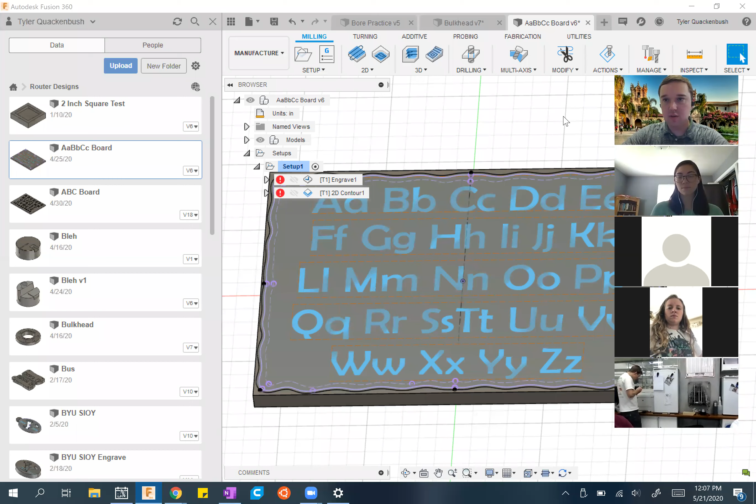Okay, so first things first, let's do this. Put that away for now. Okay, so with the 2D contour practice, oh, that's what I didn't pull up. I'm gonna open up that 2D contour practice that you guys were working on. Just give me a second. Okay, so in that 2D practice, you guys who did it went through a bunch of different things. Basically, you took this guy, and on a bunch of these different pockets, you used different tools and different parameters to mill out a bunch of these toolpaths.

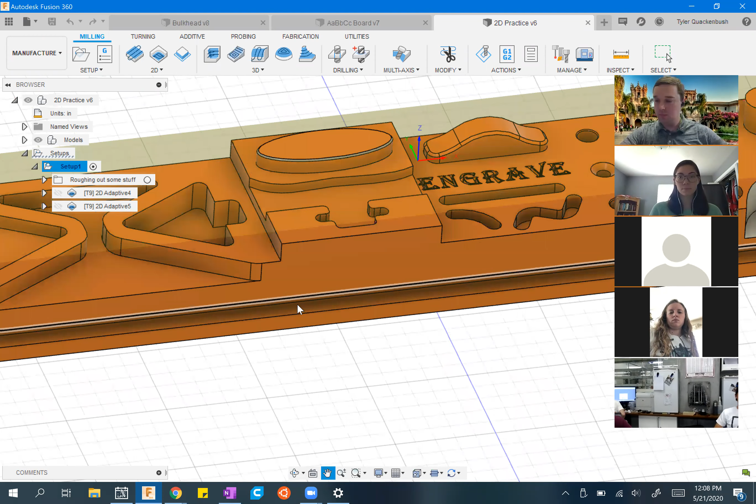So one of the big things with the 2D adaptive that I hope you guys got out of this practice assignment was the difference in selections. So when we come into here, actually, let me just make a brand new one. Oh, dang it. See, the window where I see your faces perfectly hides where that window pops up. Okay, so when I come in to create a 2D adaptive and I have some tool, when I select my geometry, we talked about the difference between selecting a face versus selecting a contour.

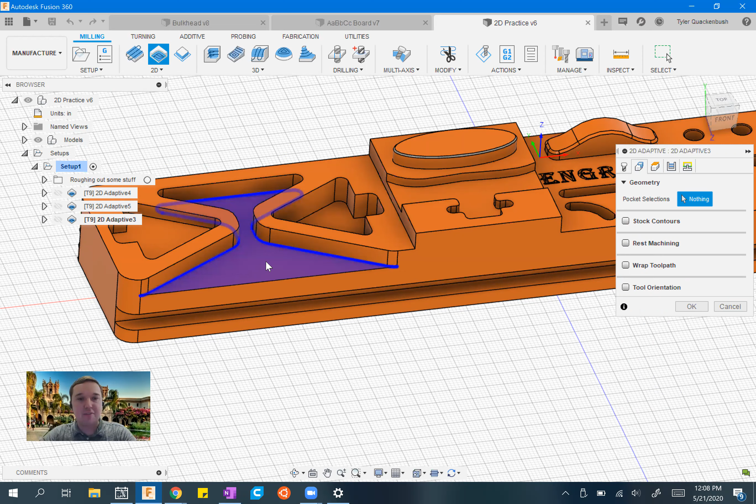And one of the big things in there, and something that I've been since learning, is when you select a face, Fusion has a little bit more information to work with. It can detect that there's a face that drops down over here and faces that come up. Therefore, it's able to guess that you're approaching and using this as an air region where you can approach from the outside and not hit anything. Mastercam doesn't make any assumptions like that, which is powerful, and yet sometimes you just wish it would.

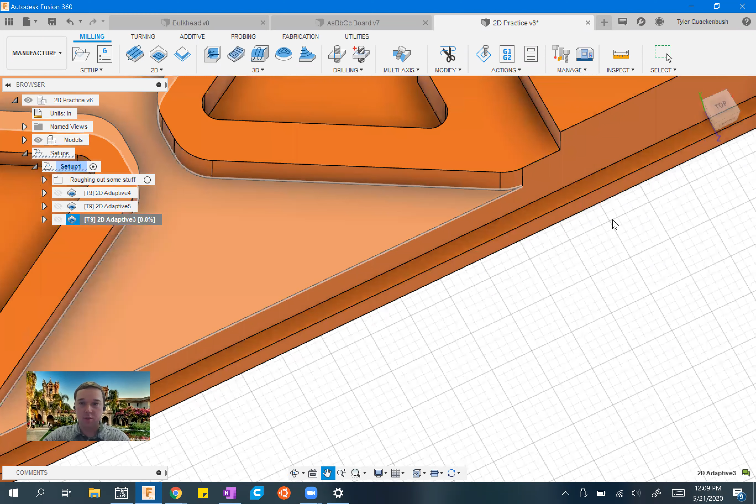The other way I had you guys select this in that practice assignment was to go in and select this chain, just that guy, and verify which side this arrow is on. So you'll notice when the arrow is on this side, we'll mill from this edge of the pocket. And once again, Fusion uses a little bit of background information to figure out what exactly you're wanting to do. Versus when we click that arrow, we get off to the other side. In the next practice assignments, you'll have to do some other weird stuff too.

Sorry, one sec. Excuse me. Can you guys hear me now? Sorry, I lost my video.

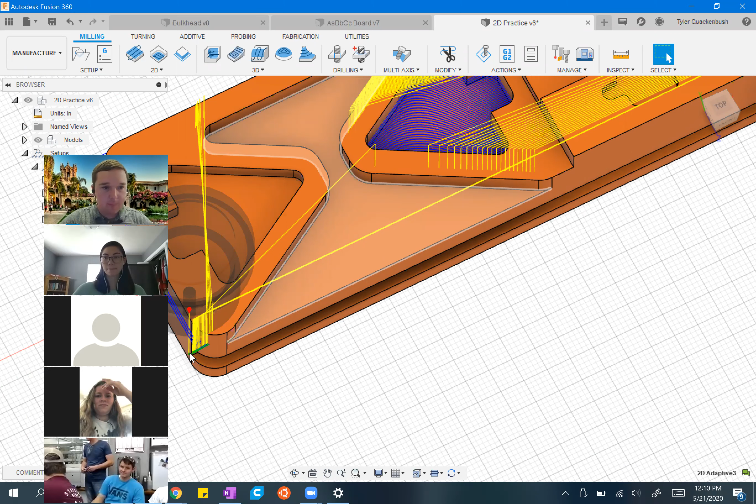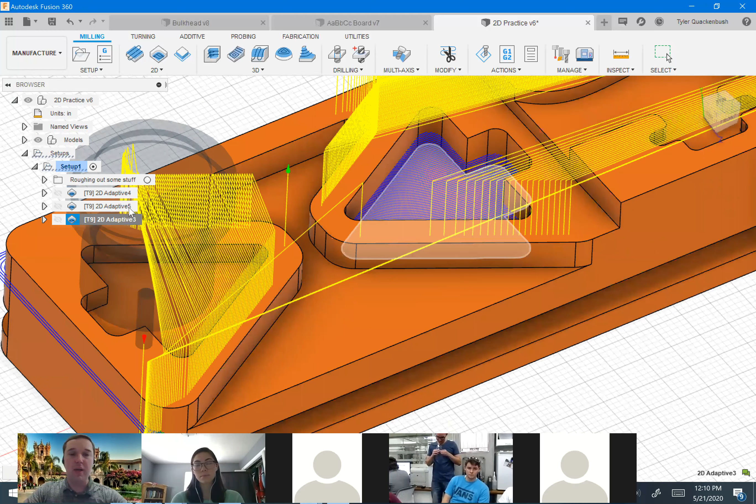Yep, great. So you notice when I flip that arrow, now Fusion is using what it knows about my stock and that contour and the side I told it. So now it's saying, oh, okay, you want me to mill away all of this stuff and leave these intact, which is not what we want to do. But if we just add a contour, that's the best Fusion's going to be able to figure out. So you can end up with a situation where you've got something along these lines.

So let's say I want to select the contour that borders this face. I select that contour, but that's not entirely what I do. If you remember in Fusion, you click on that again. You select whether you want a closed or an open contour, in this case closed, and Fusion guesses. We accept it, and we move on. I check the arrow and make sure the arrow is highlighting this internal section here.

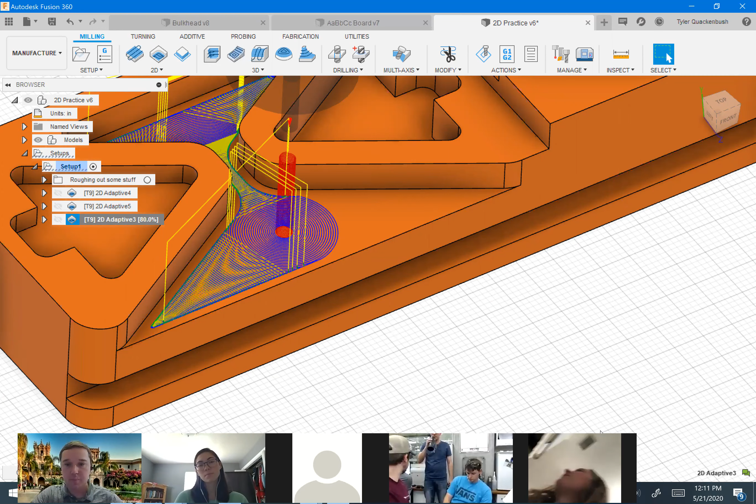What this allows me to do is sometimes there'll be geometry on a face that you don't want Fusion to know about. Geometry that's below the plane you're milling at, you don't want Fusion to care in some scenarios. You'll see this in the practice assignment I've got for you guys this week, and we'll talk a little bit more about it then. But that was just a brief review of the contour versus the face. Any questions on that one before we go on to talking about optimal load?

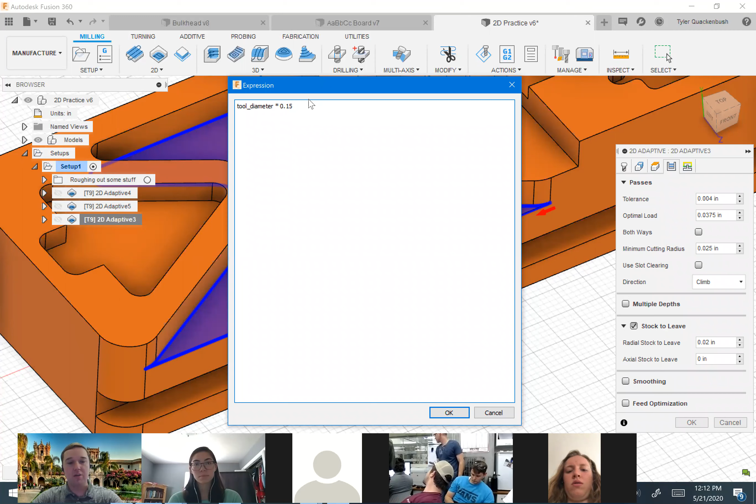Awesome. So once again, reviewing from that practice assignment, the optimal load in your practice parameter is like your step over in Mastercam. And remember, we get at the percentages and stuff by this edit expression button. And this takes us into this math window where we can use the tool diameter and multiply by some percentage to set our step over. In that practice assignment, you guys played with that and found that different tool percentage of step over makes crazy things happen. You will also have played with minimum cutting radius parameter, which I'll bump up to 0.1 inches right now. And we'll briefly review what those two do.

So the step over now is using more of the diameter of my tool to cut. And then on these corners, the radius that it's putting on that corner is now larger. And you got that.

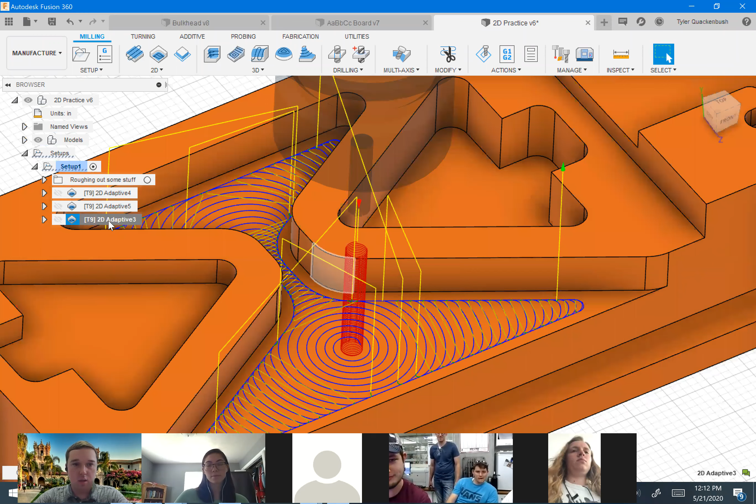Okay, another thing, yeah, go for it. Really quick, is there a good rule of thumb for like the percentage you want to use for the optimal load? Yeah, so that is a great question. Thanks Ashley for asking that. Feel free guys to ask me feeds and speeds questions as much as you want to. It's really hard when you guys can't get at the machines to really get a baseline for these things.

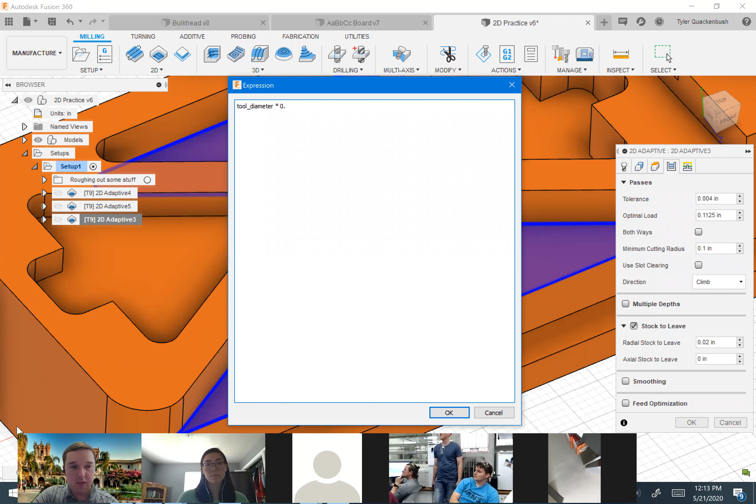But I will tell you with the optimal load, what this tends to be in a milling scenario is it really depends on a bunch of factors, but generally you'll go 10% to like 15%-ish if you're working in aluminum. In mild steel or stainless, you'll use different numbers, and that depends on your step down, as well as how deep your tool is cutting, what material you're cutting, and the step over all kind of match. And let me show you something else. Basically, the rule of thumb there is you want to keep, for a given material and situation combo... oh no, it's your practice assignment. Don't look.

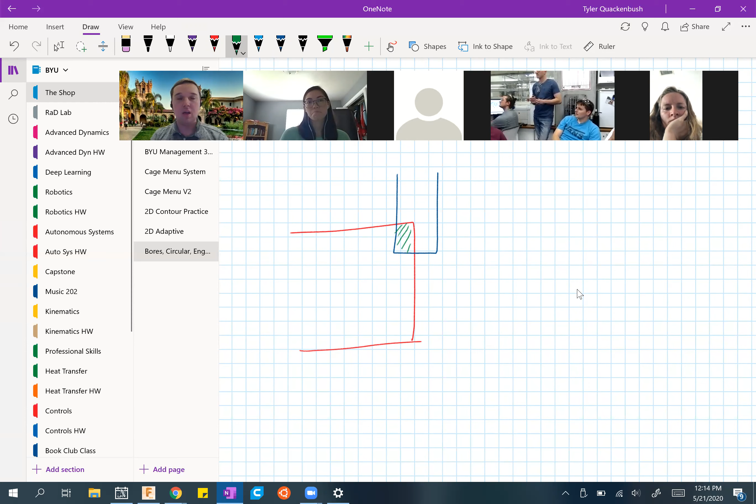So basically, Ashley, imagine here's my stock, here's my tool. Basically, these two are gonna overlap some amount as you're cutting. And you see if I bring it deeper, that rectangle gets bigger. If I bring it in, that rectangle gets bigger. Basically what you're doing is you're keeping this overlap area to be about the same for a given speed and a given material. So if I were stepping down, let's erase those. Oh, phooey. So if I were going down really deep, I'd use less of a step over. I'd have my tool make a really thin, tall rectangle. If I were going really shallow, I can step over a little bit more to keep that area the same. Does that make sense, Ashley?

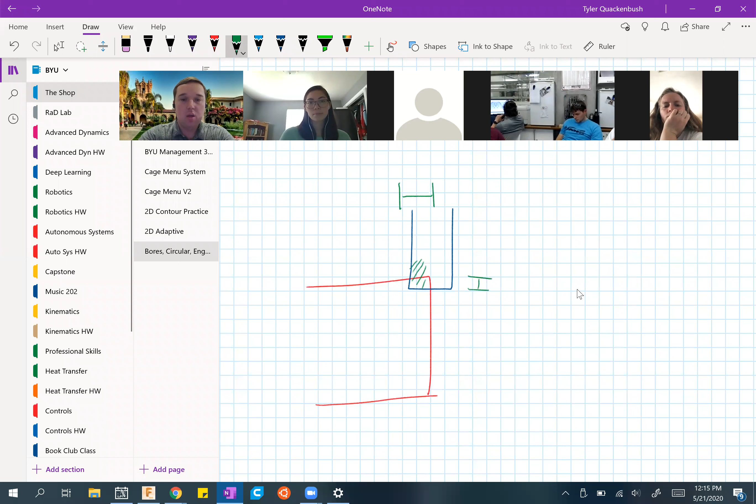Okay. In the router world, we tend to do a large step over, but a shallow step down. And we do the opposite in VMC world, we tend to do a large step down with a very small step over so that we're using the maximum flute lengths. For reference, Ashley, when I'm on the VF4 or DM1, typically I'm running at 10 to 15%. When I'm on a router, I generally do like 45, or in some materials I'll do 75% step over.

One other note about this is 50% is a very bad number, and you never want to use that for any reason. You get all sorts of tool chatter issues specifically at that. 45, great. 55, great. But 50 is an absolute no-no. So there's more on that when you look into chatter and stuff, but just so you guys are aware. Yeah, say I was making this out of wood, I'd do probably 40% step over and then a really small step down. Awesome.

Minimum cutting radius. We can also edit that expression and do a tool diameter. And you see, as I start typing, it shows me the stuff I can do. So I'm going to find my tool diameter, hit enter, and multiply that by, I don't know, we'll say... In Mastercam, the minimum it lets you go is 2.5% of your tool diameter, and it defaults to 10% of your tool diameter.

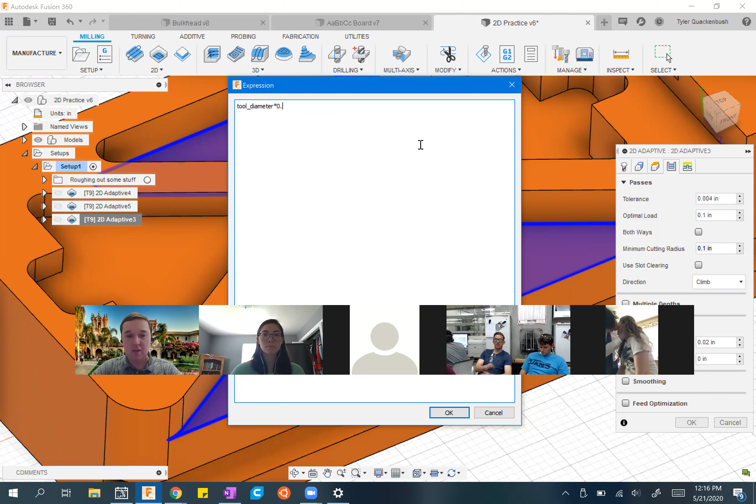Once again, that's a chatter thing. 2.5%, you'll get more chatter than 10%, but you also can hit those corners as well. And I'll just show you guys too how we simulate. So some Fusion tips real quick.

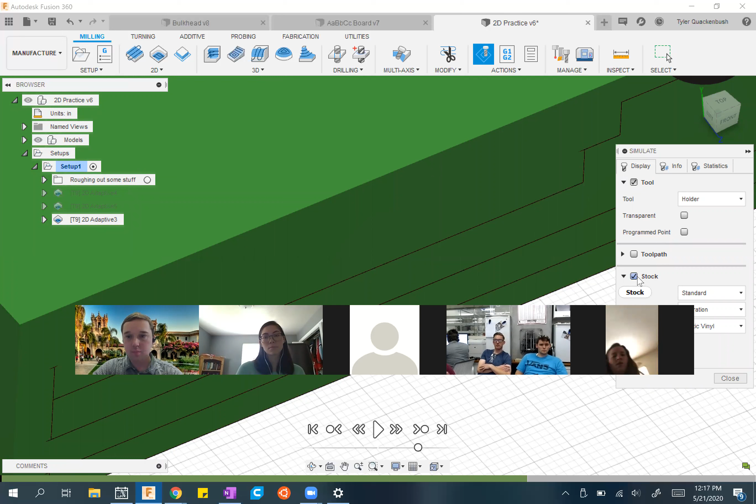If I select my setup and hit simulate, it's gonna simulate all of the operations in that setup. But I can come in and just control click those two and simulate those, and it'll bring it in. So you'll notice when you come in here, usually it'll have only the tool and toolpath set up. So if I start running this, all I'm seeing is my tool run through. I'm not actually seeing anything cut. I usually disable toolpath and show stock, and then that'll actually display what you're machining.

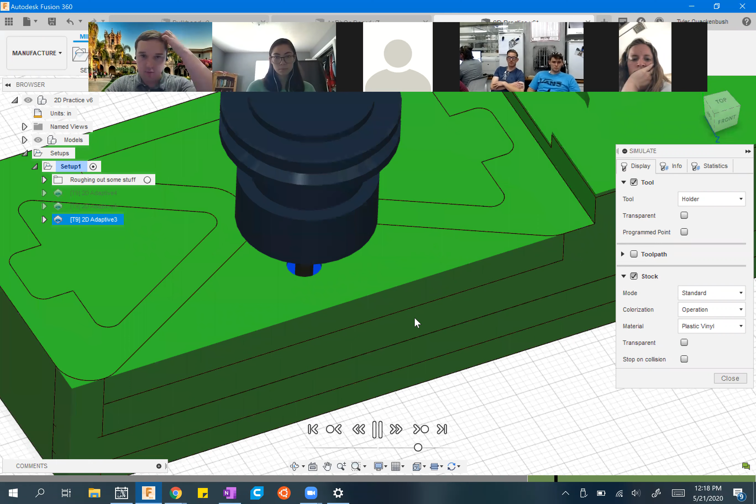Some other fun things in here. If you go to next move, it just moves one step forward in the G-code. But if you hit go to next operation, it'll simulate all the stock and then jump to the next operation in the list. So you'll see in here, this is what this guy's doing. And I'll show you the effect of that minimum corner radius. I'm just gonna go to next operation so I can show you.

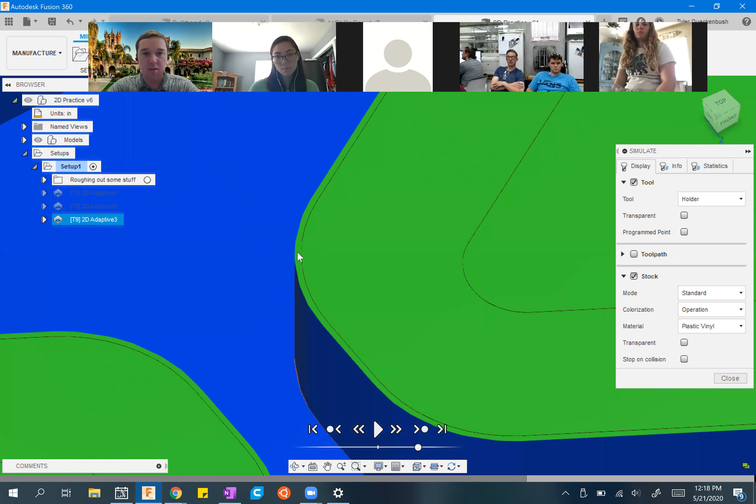Oh, I didn't realize. So you'll see the edge of my geometry and the edge that I milled have some offset. Who can tell me what that means? Anyone have a stab at it? If I had selected this contour down here and my tool didn't quite get there, it means I'm leaving stock on walls. So that looks like I probably have 20 thou stock on walls there, so I'm not quite reaching where I need to.

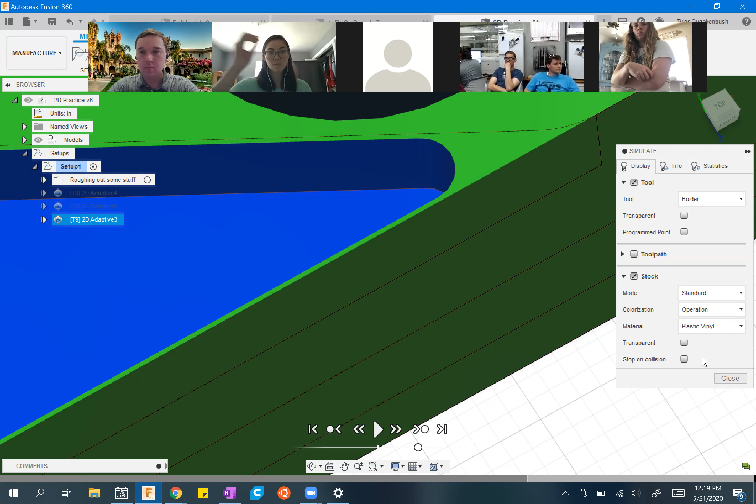Here you can see the effects of that corner radius. Even though my tool's diameter was not quite as large as that, it's making sure the tool never fully stops and then changes direction. So instead of moving like this and then changing, it'll round that corner to make sure this tool doesn't stop and chatter. If we were on the machines, you'd be able to see a big difference in the surface finish of those two parts. Okay, any questions about that stepover or minimum tool radius?

Okay, sweet. The next thing to chat about is Fusion's rest machining options. For those of you who are familiar with Mastercam, Fusion's rest machining for 2D adaptive at least is really weird. In Mastercam, it'll simulate the previous toolpaths and then say, okay, this is the stock that's left. That's the only stuff I need to machine.

In a 2D operation in Fusion though, the only input you have to rest machining is a previous tool diameter and corner radius. Corner radius being what you get on a bullnose end mill, where it's this shape as opposed to a completely square end, has the rounded corners. In this case, you could do a ball end mill as well. Let's say I roughed with a 1/2 inch ball end mill. I'd have a corner radius of 1/4 inch, which roughing with a ball end mill is dumb and you should never do it. But you'll rough with a 1/2 inch bullnose very frequently because we have those loaded in the machine now.

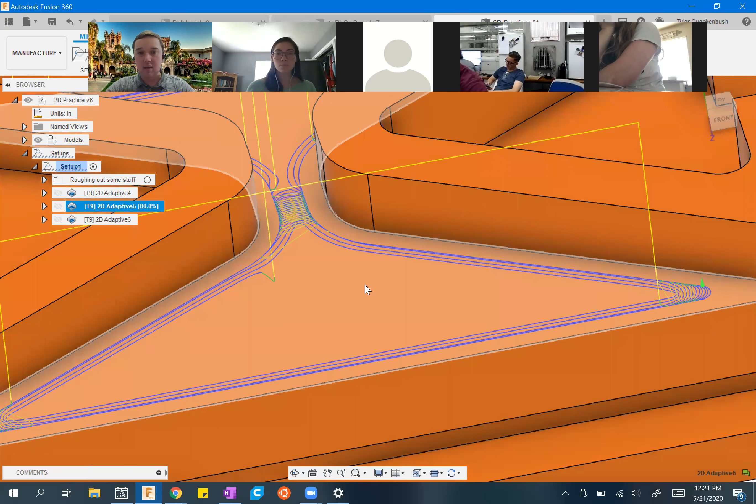So I can tell this toolpath, hey, I went through with a 1/2 inch bullnose. I want you to clean up everything I wasn't able to get with that tool. It's a little primitive method of stock, but what you're seeing it do here is saying, okay, he couldn't get into this pocket with a 1/2 inch end mill, so I'm gonna bust out that. Because it was a bullnose, he couldn't get at these bottom corners, so I'm gonna rough those out. And because he had a larger diameter tool, his corner radius was larger, so I'm gonna come mill this out here. And if you see on, oh, wrong toolpath.

For those who've done the practice assignment, you'll have done that firsthand and seen what it does. Okay. Any questions on rest machining as it stands in a 2D operation?

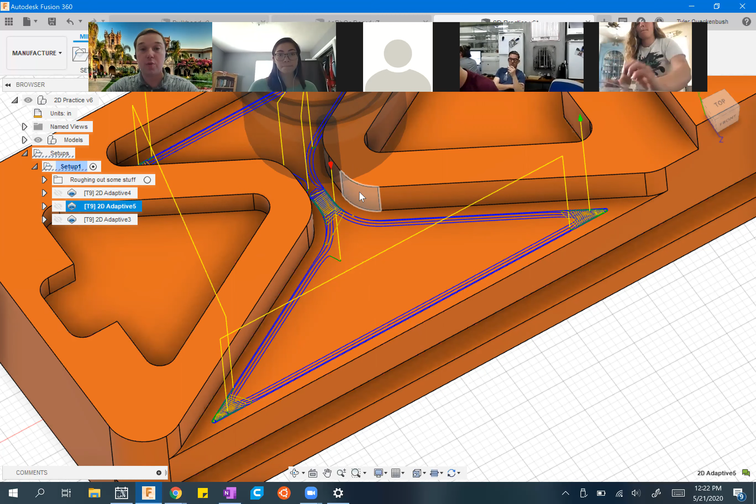Okay, sweet. When we get to 3D operations, you'll see that 3D operations do simulate stock and do it just like Mastercam does, which is really useful. That being said, you can use a 3D adaptive clearing in almost any situation you'd use a 2D adaptive clearing, but the selection method is different. And we'll talk about that when we start getting to 3D operations.

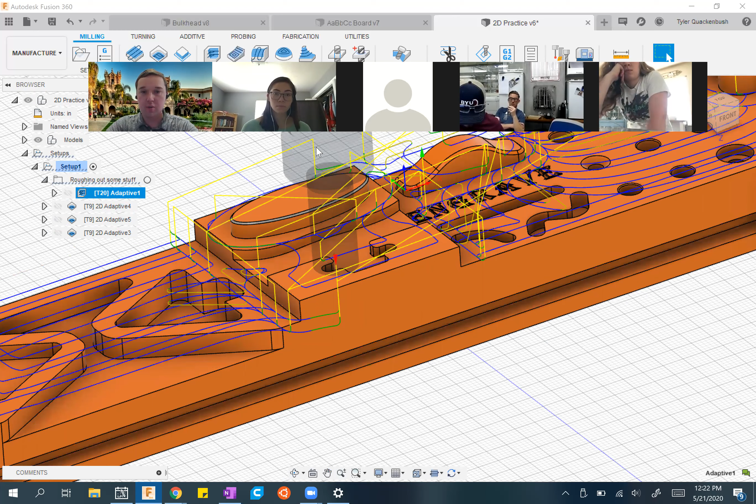Okay, awesome guys. I think that covers that. I'll challenge those of you who haven't done the practice assignment to go through, and I handed you an F3D file, so you get this full file with some stuff in here already. In this roughing out some stuff folder, you have this adaptive. This is a 3D adaptive that I created to just rough out all the material. So this is with 1 inch end mill, and it's just not good parameters for machining, but it roughs it out so that you can actually see the pockets.

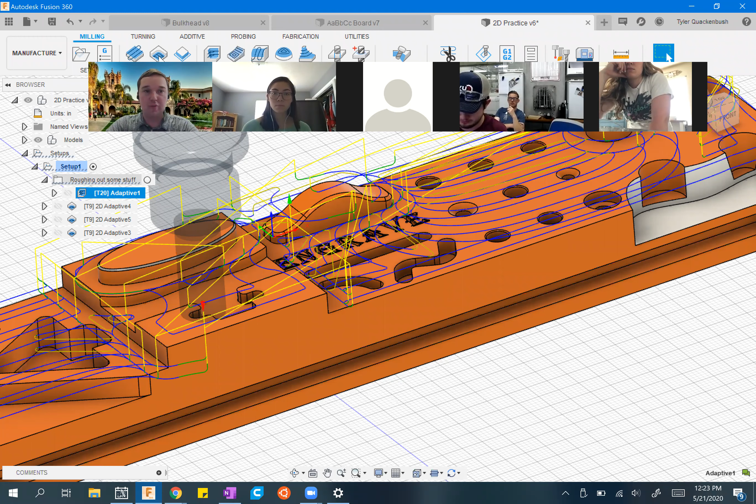The challenge is, and still stands, to replace that with a 2D adaptive clearing and do all the selections you need to get it done. Briefly, I'll just show you one tip on that. So if I create a new adaptive, it comes in here. When I finish, I can drag that up into that folder and it'll go first. But let me show you something that happens when you select multiple things.

So if I select this and this and this, Fusion will actually calculate the right depths for each of those things in the adaptive toolpath. So you can select multiple things in one 2D adaptive, and you'll notice it generate toolpaths for each of those pockets individually.

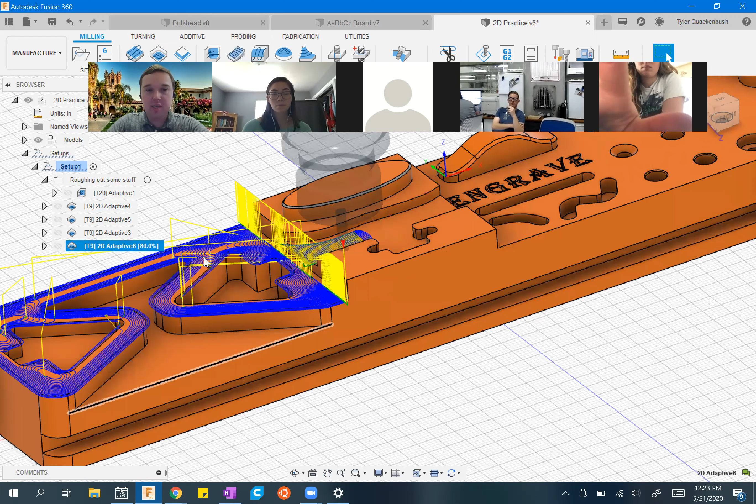And here we see one of the drawbacks of face selection: even though these features are below, Fusion assumes that there's stock above as well because I selected that face. This is a situation where you'd want to use a contour to select. But as you see it generate each of those toolpaths, you can select multiple things in one.

Okay. So that challenge still remains. If you haven't done the 2D contour practice, please do it. 2D adaptives are one of the most used toolpaths you'll ever use in Fusion 360 when people are coming on the router. They're also one of the toolpaths with the most parameters that are easy to mess up.

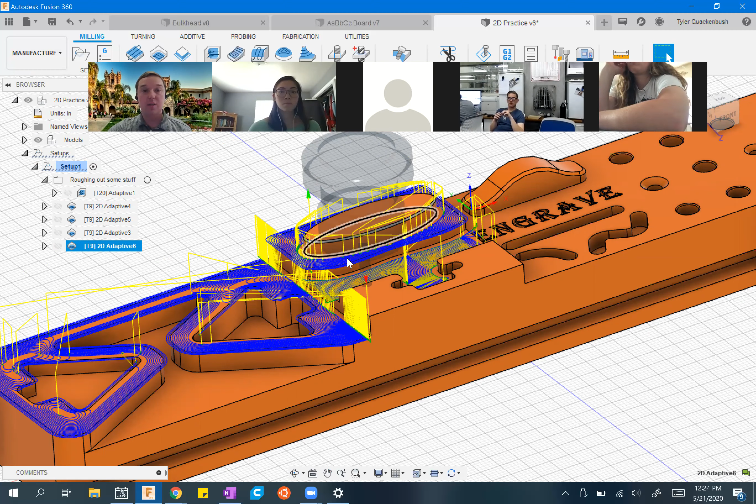So when people come through on the ShopSabre and they're having programs that we need to check over, adaptive toolpaths are going to be one of the ones that we need to check every single time. And we need to go through it in depth and in detail to make sure they didn't do stupid things. Like if they were planning on roughing out this entire pocket and they only rough this out, you get problems. I'll show you one situation where that comes into play next time, after you guys have done the practice for bores, circulars, and engraves.

Okay, I think we're going to move on beyond 2D adaptives. What questions do you guys have about 2D adaptives, about feeds and speeds for them, about anything on that front? Really quick, can we go over the stock contours from the last problem? Yeah, totally. Let me pull that up and remind myself what it is. Stock contours option. Okay. Yeah, I remember that one now. That one is for machining this island.

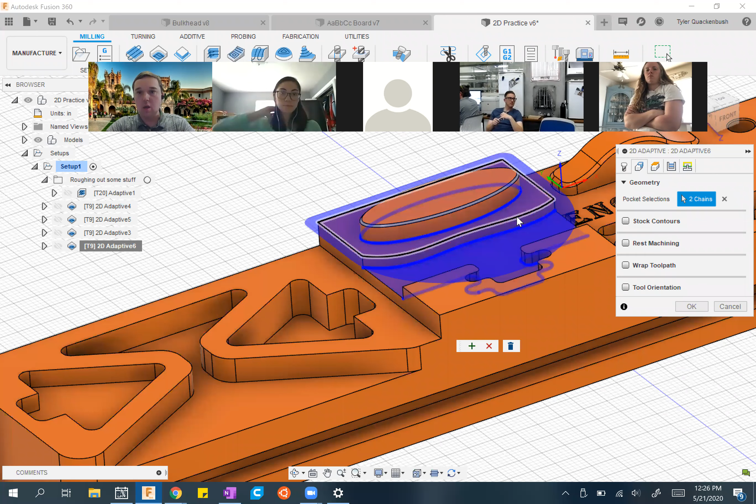So I'm gonna edit this toolpath and I'm going to delete that, delete that. It didn't work. Okay. So I select this face, and you're asking about the stock contours option. So what the stock contours option does is it tells your machine, by default, when this is unchecked, this is what your machine is assuming. So that yellow line is saying, okay, everything contained within this yellow line is stock. Assume that my stock comes up to this and figure it out from there.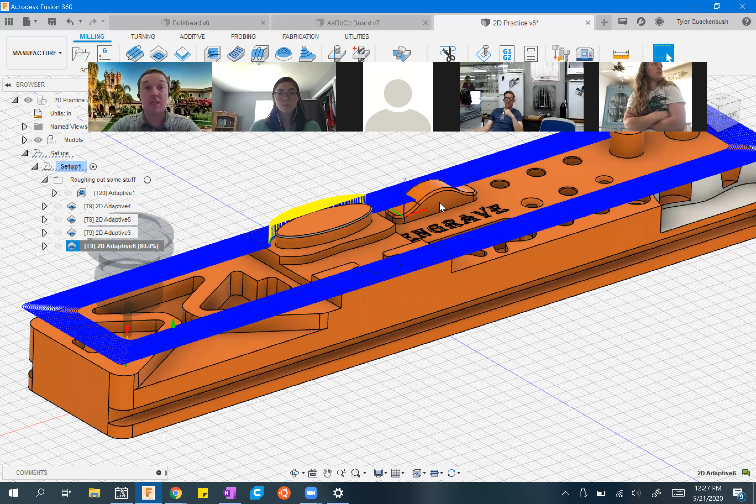But Fusion uses some other information to that. So if I click that stock contours and I click OK, you'll notice my toolpath is going to generate all the way from the outside. I've told it, I selected this face, but my stock goes all the way out to here. You need to get rid of everything. Which, in the case of having roughed out all that stuff already, we don't need to.

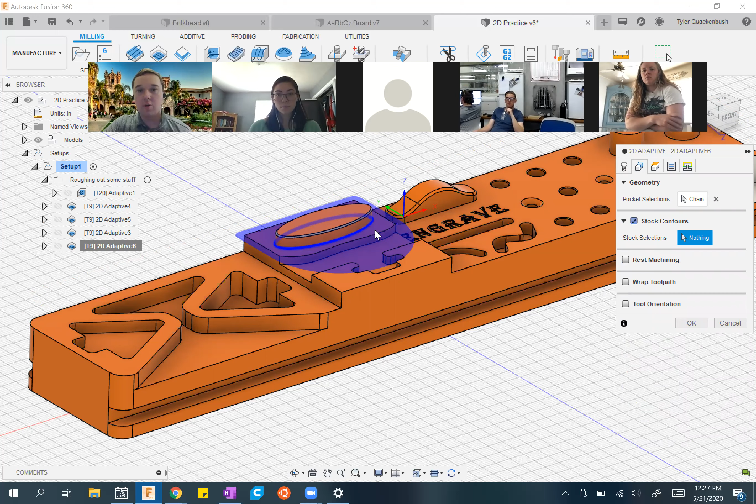So, Fusion's default unchecked, I said earlier, was this yellow line, but I'm wrong. Unchecked, it goes based on your selection. So in this case, this is what it's assuming. So you see how that contour on the outside, that blue one right now, is slightly yellowed. I've told it that is the edge of my stock and only compute stuff within that box. This is what it does by default when you don't have stock contours selected.

So I've told it, ignore everything outside this box. I've already machined it, don't worry about it. I will make sure you don't hit anything. And that's by selecting that specific spot. If I unselect it, then Fusion says, okay, I'm gonna try to figure it out based on your face selection. And since I clicked that face and it sees all of the walls around it are going down, it's gonna make that assumption that I've already roughed everything out.

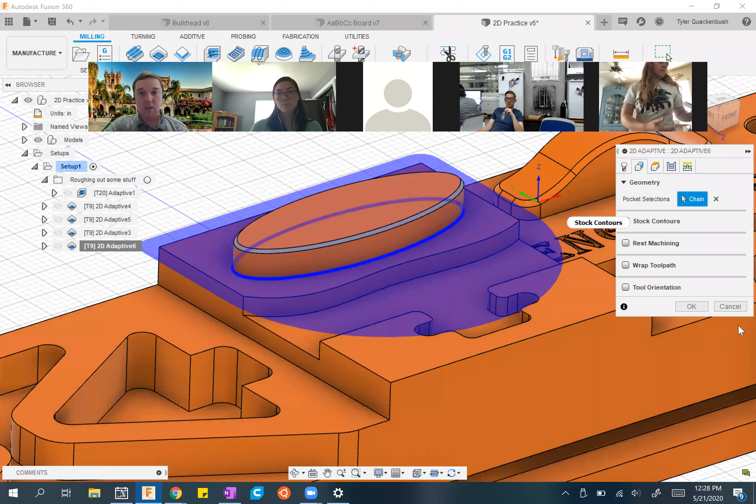Now that can be a bad thing too. Let's say I haven't roughed out everything, and this is actually the first operation I'm gonna do before roughing out some stuff. So I come in here and I say, okay, great. I just wanna do that pocket first. When I come in and simulate it, I'm gonna have a crash. So that red line means I had a collision with stock.

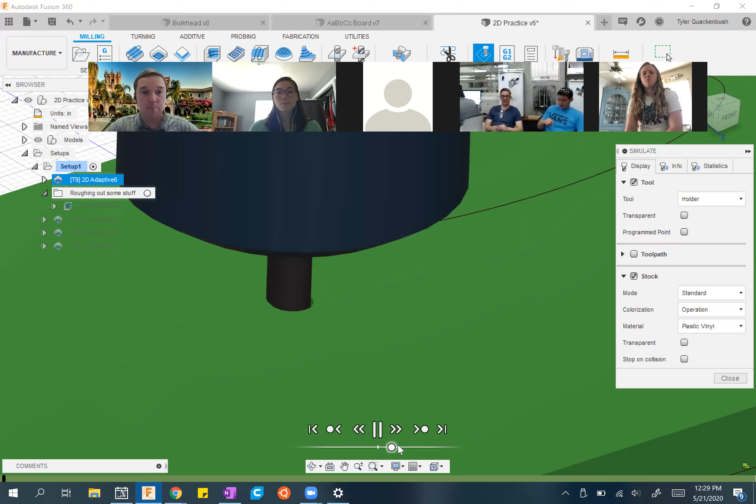And if we go back to the beginning and slow it down, you see it rapid moves and then collides with the stock right there. So it is moving rapidly through the stock and not at a cutting feed rate. So it would break our tool. You also see it's cutting a full slot width when it's expecting to only cut 10 to 15% of a step over, if that makes sense. So that is one of the parameters that makes a 2D adaptive very versatile, but also really easy to break.

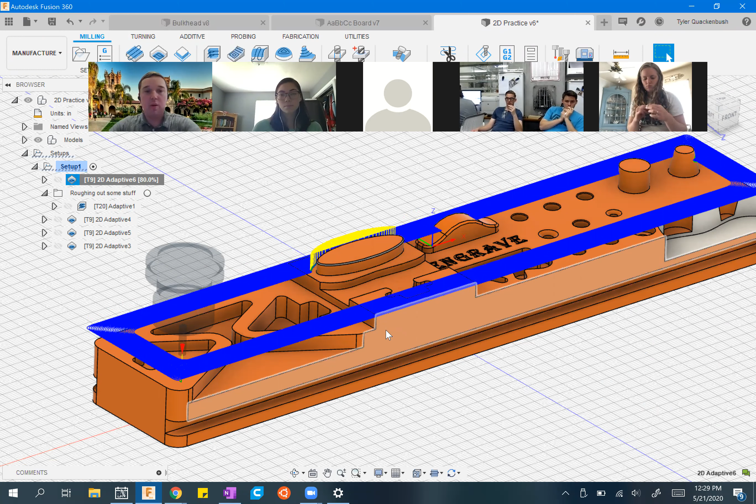In this case, my stock contours, I'd want to use this whole thing as my stock contours. And that's the default selection when I check it. Then I come in and I generate it. And it's gonna take a hot minute because my computer's slow. But if we were to go through and simulate this, we'd see it successfully cuts the stock and never crashes and doesn't do anything weird. Okay, it does do something weird. So because we told it the stock was there, but this is the only stuff it cared about, it's gonna cut off these pegs. So there you have it, Ashley.

Any other questions about that stock contours option? Sweet. Okay. Thanks, guys.

2D adaptive is great. Okay, did any of you get a chance to play with the bulkhead and try using 2D contours and adaptive operations to machine this out as if a student had brought it? Okay, sweet, that's okay. This is a fun exercise. I'd actually recommend doing it after the lesson we have today, because you're gonna want to use some bores instead of 2D contours. So let me walk you through how I did this.

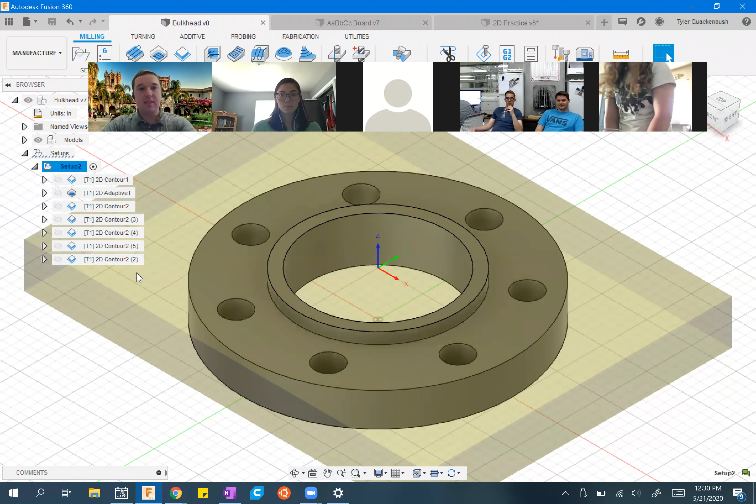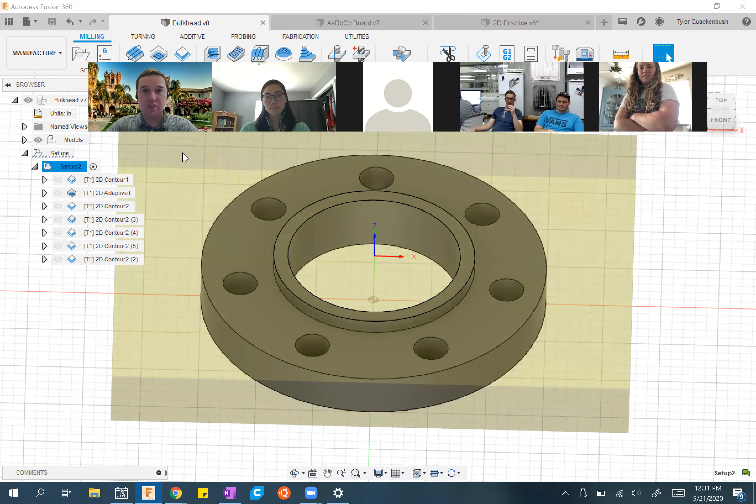So I made a setup, Z being up, of course, X this way, Y that way. This is actually a piece I machined on my router at home. I did it out of aluminum, and it was chattery as all get out, and it was terrible, but I learned. So I start off, let me just simulate this for you guys. So this is all with 2D contours and adaptive operations. I'll show you in a minute how I could have saved myself some time using what's called a bore operation, but this is a totally valid way to do it.

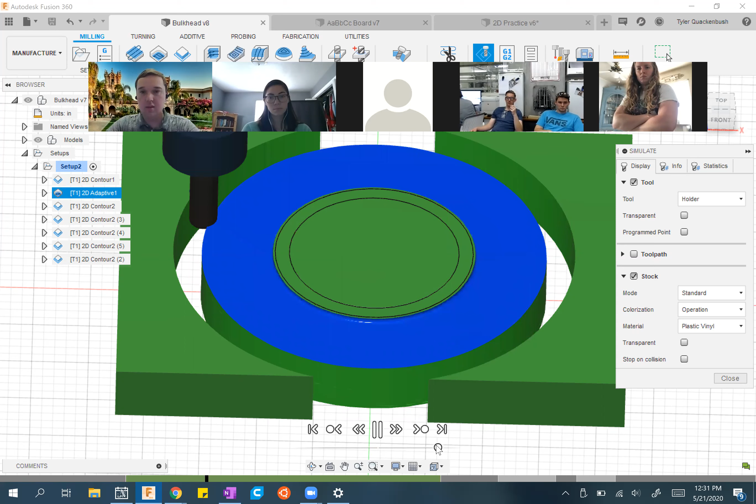I started out by slotting out, which was a bad idea, full slot width, cutting out a circle, because I didn't want to have to rough out all of the material around it. That was a bad idea. Then I came in and I did an adaptive toolpath, a 2D adaptive, to rough out this kind of shelf here. And I apologize for the outrageously slow simulation. I had to tickle it to death on my router.

You see it come in with that 2D adaptive with multiple depths, it gets that. And then it comes in and does a 2D ramped contour. Then it comes in and roughs out this middle part. Oh, geez. Roughs out that middle part. And then comes and does, where are you? Christmas. Why can't I find you? I think this is it. Nope, that's in the middle.

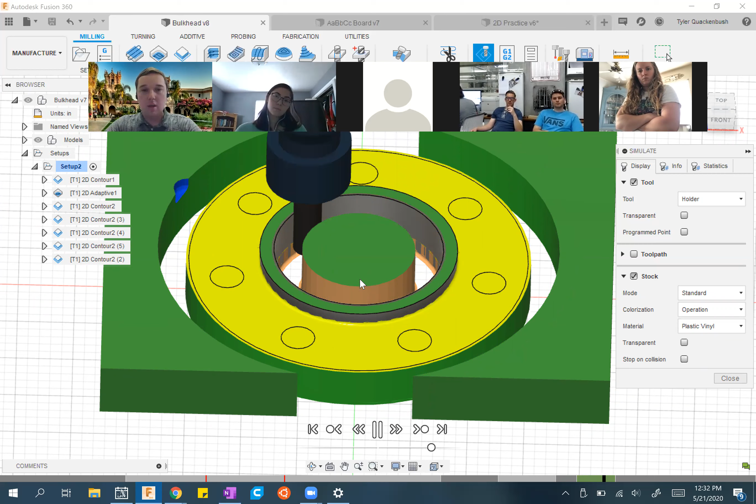Okay. In just a second, what it's going to do is it's going to use that 2D contouring operation. And remember how we talked about being able to do a ramp where it ramps continuously around the outside or inside of a contour? That's how I did these holes. Instead of throwing on a drill bit or instead of plunging straight down, I had it kind of spiral down. In Mastercam, that's called a helix bore.

And we'll use it on the router probably even more often than we use it in Mastercam, because we'll only have 1 or 2 drill bits to set up on the router and no spot drill. So it's a pain in the rear to try to use the router for drilling operations. But we can get the same geometry just with an end mill and a bore toolpath.

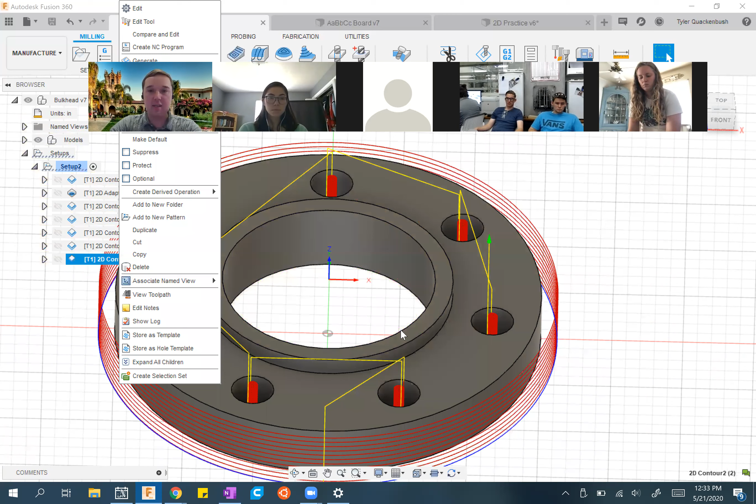In this case, I used a 2D contour, and let me show you how that contour was set up. In order to do that, I had to select my tool, select my geometry, which was a specific edge on the bottom. I had to come in and disable a bunch of things. So I had to set my heights right. I had to set my passes so that it was not doing multiple depths. I had to enable stock to leave and smoothing.

Then I had to come in, check my ramp, figure out a ramp angle and a maximum ramp step down, which are 2 parameters that fight each other. In other words, I had to do a lot of button clicking to make this work. If I had been smarter, however, I would have gone into my 2D operations and clicked bore. Bore and circular are 2 toolpaths that are really similar. I'm basically only going to show you the bore today because they have essentially the same parameters. But in the practice, you'll take it.

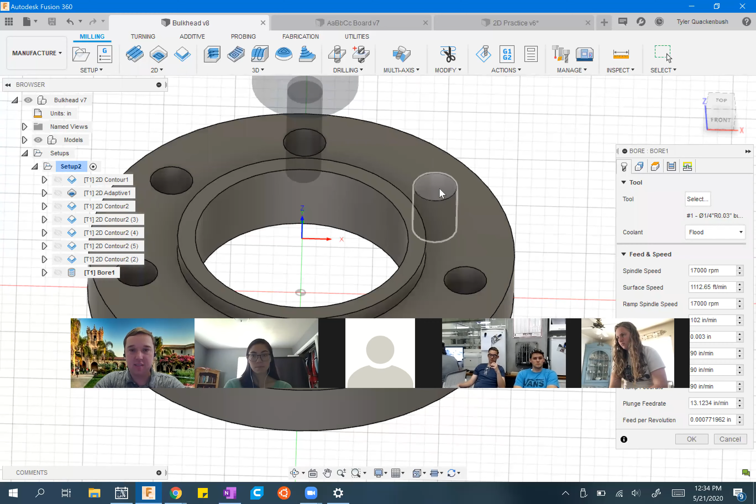Now you'll see with bore, I'm not selecting edges, I'm selecting faces. So I want to bore out that face. And you see it already previews what my toolpath is going to look like. Because it's such a simple operation, it can do that. All I have to do then is say, okay, I want to do that. I'm going to select all of the holes with the same diameter based on my 1 selection.

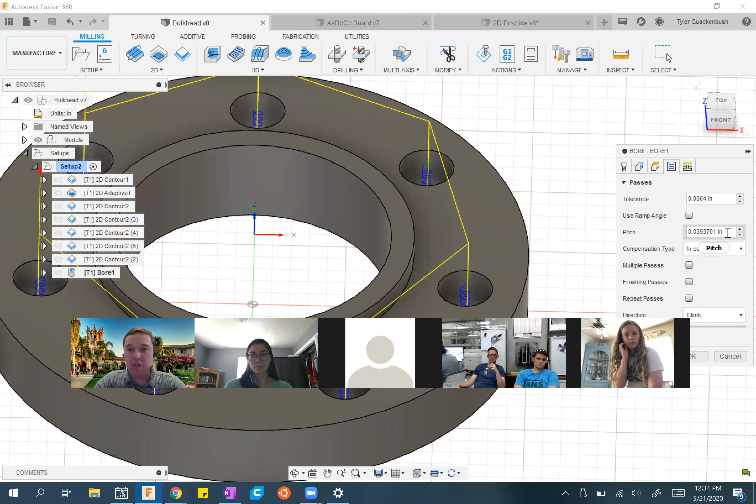My heights, it's going to take from that geometry, so I don't have to care if I've got it set up right. All I have to change is my pitch, which is the step down on each of these. Or I can tell it I want to use a ramp angle instead. Instead of the 2D contour where those 2 fight each other and it automatically determines which one it uses, this one we get to be explicit and tell it exactly what we want. In this case, ramp angle versus pitch, I'd probably actually want to use a ramp angle.

So let me explain the difference between the two. Pitch, I tell it how far down I want it to go on each step. This is useful if you have a really long contour that you're going around, and say, okay, I want to have it go down 1/8 of an inch every time, and then you know that tip is only down 1/8 of an inch ever. Ramp angle is useful in really tight spaces like this.

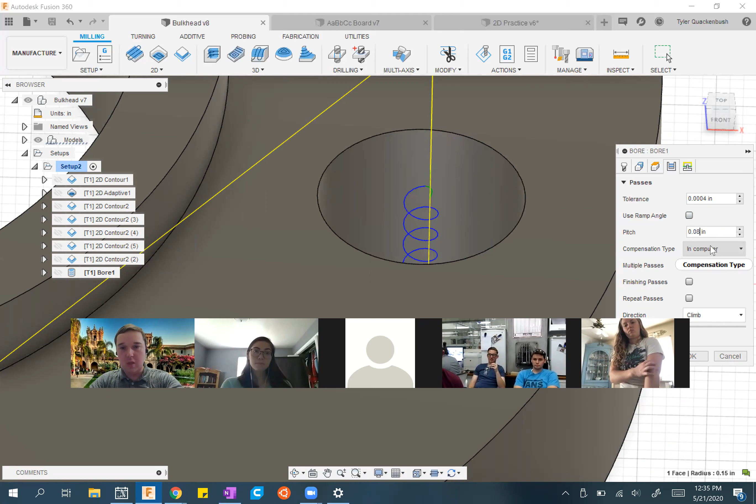If I were using a pitch of, let's say, 80 thou, looking at that toolpath, I'm primarily plunging. I'm not primarily side cutting. Instead, I'd come in and use a ramp angle and say, okay, a 2-degree ramp angle with a 1/4 inch end mill is not going to give me much chatter, so I'm going to do that.

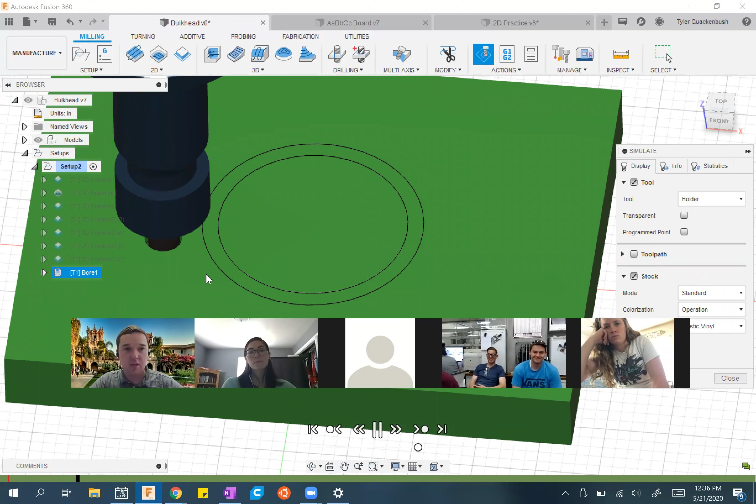Then the glory of this toolpath is I'm done. You click 3 buttons and you can get holes where you need them. You can select all holes that have the same diameter, and you can do it real quick. In this case, I can come in and simulate this, and okay, it's going to have a little bit of a crash because I didn't simulate the other stuff. But you see, it's a lot easier to work with. When we talk about drilling operations, you'll see bores and drilling operations go hand in hand.

Okay, what questions do you guys have about bore operations?

Okay, sweet. Bore operations are probably going to be, I'd say, on the hierarchy of stuff we're going to use on the router... Primarily, we're probably going to use 2D contours. Secondarily, bore operations. And tertiary, we'll probably use 2D adaptives. Those are probably the only 3 toolpaths that the majority of students on the CNC router are going to use. And those are kind of your 3 bread and butter operations for anything on the router.

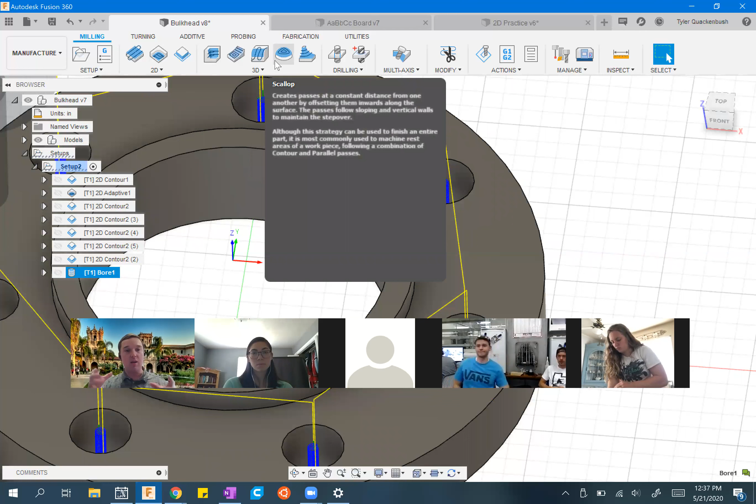3D operations on a router are a lot less common because you're working with plate stock as opposed to square or bar stock. Okay, great. I'll just show you real quick. The circular is much the same thing with the same tool and same face selection. I can also select the same diameter. I get the same controls there, same heights.

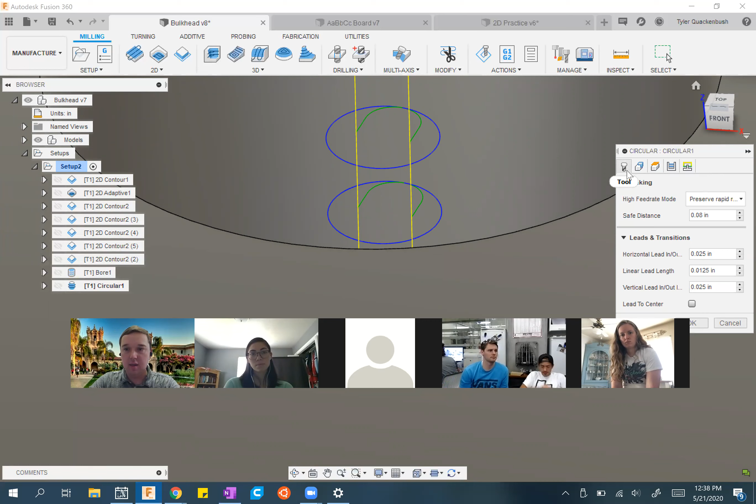But instead of going down gradually, the circular operation takes steps down. So it'll actually plunge, cut, plunge, cut, plunge, cut. You guys will play with that a little bit in your 2D practice, and I hope you'll learn something good. Okay. Any questions on bores and circular operations?

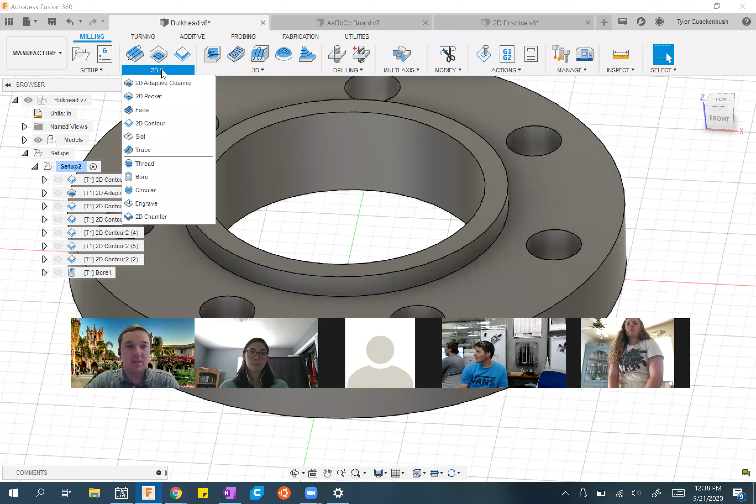So when would you want to use which one? Oh, totally. So bore versus circular? That is a fantastic question, and I don't know if I have an answer for you. So in the 2D practice assignment, which you guys will go through, you will notice that they lead in and lead out a little bit differently. And that may be part of the key of what it is. I honestly don't know where you'd want to use one versus another.

They're almost interchangeable. I can tell you the bore will probably get you better results if you're in a small hole or in a larger circle. But I really don't know. So we'll have to think about it and we'll talk about it next time. Hopefully we'll have Austin here too so he can kind of shed some light on it.

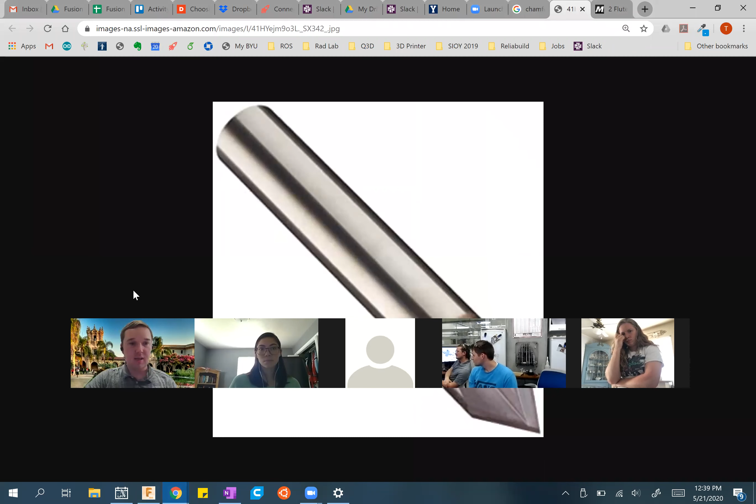Okay, awesome guys. We're gonna switch over and talk about tools real quick. And then I'll show you the engrave toolpath, which is pretty simple. Okay, one piece of confusing terminology we have in the shop that I know confused me for a while and is confusing for a lot of people is the term chamfer mill versus chamfer tool versus drill mill. So I actually don't have a picture of a chamfer tool up.

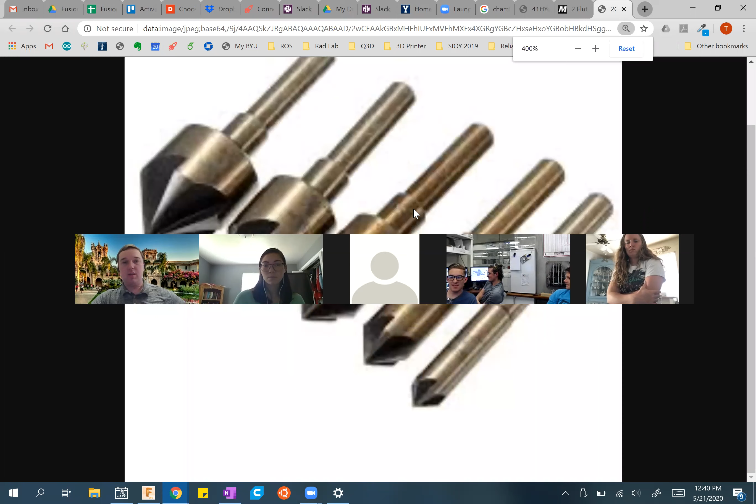So a chamfer tool, chamfer mill and drill mill. Okay, there we go. So this is a chamfer tool. Chamfer bit, I should say. So a chamfer bit is primarily designed for drilling. So these ones are not used for edge milling at all. You see they have multiple flutes on the front, but their flutes are relatively dull.

These tools have some of the highest axial load forces you'll ever see in a tool. Usually we only do them by hand because we've broken so many of them in CNCs, it's not even funny. These are probably the ones you're familiar with in your parents' workshop in the garage if you've ever used one. We don't use them very often unless we're on the drill presses. Instead, milling has given us two different options.

So there's a chamfer mill, which is actually made for side cutting as well as axial cutting. Chamfer mills are primarily used for side cutting. So if I want to put a chamfer on the outside of some contour, I can come in and I can mill the outside of that, but they're not made for cutting very deep. We actually do not have many of these, if any, that I know of.

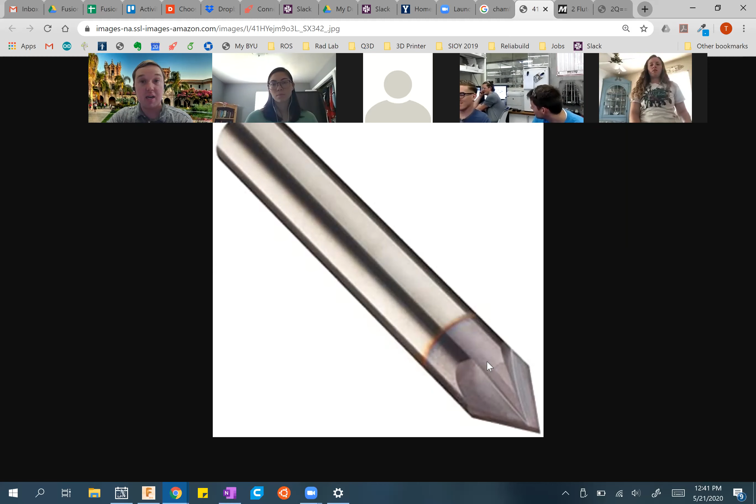We've chosen to go for something called a drill mill, and that's not a very good picture. Let's see if that one's better. But what it's hard to see on these ones is it has that same chamfered tip, but it also has the flutes of a regular end mill. So you can actually side mill with a drill mill, like you can with an end mill. You can also chamfer with the tip. We have several of these floating around, and these are what's loaded in the machines already.

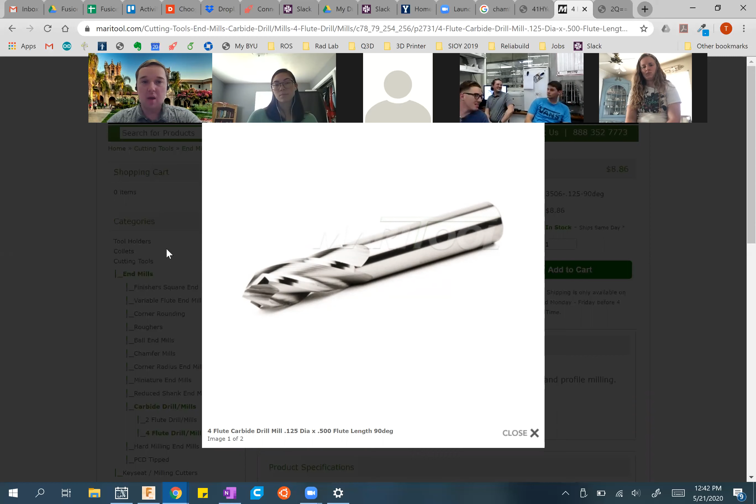Let me see. Maybe a 4 flute will be easier to see. Yeah, not much. Anyway, they have the tip angle. You also get different angles on that tip. So you can have a 90 degree, you can have a 60 degree, or you can have a 120 degree. They all mean different things, but for now we're just going to keep it at geometry and say, just make sure you have the right geometry in your toolpath and you know what you're going to use it for.

With tools with a tip like that, naturally we get some weird stuff. We'd never want to use something like that for roughing. We'd never want to use it for plunging in and cutting out slots, unless we want those slots to have a V. So we can actually do something really cool with them called engraving.

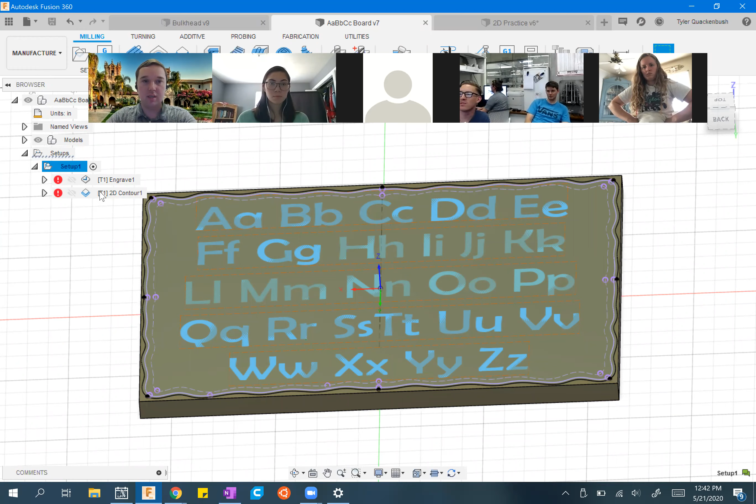So I've set up an engrave toolpath here, and I've selected this text that I've put here. This is a little ABC board I made for Scott, in case y'all are wondering.

But if it'll generate in the next year or so. I'm gonna kill the bulkhead here. What's your deal, homie?

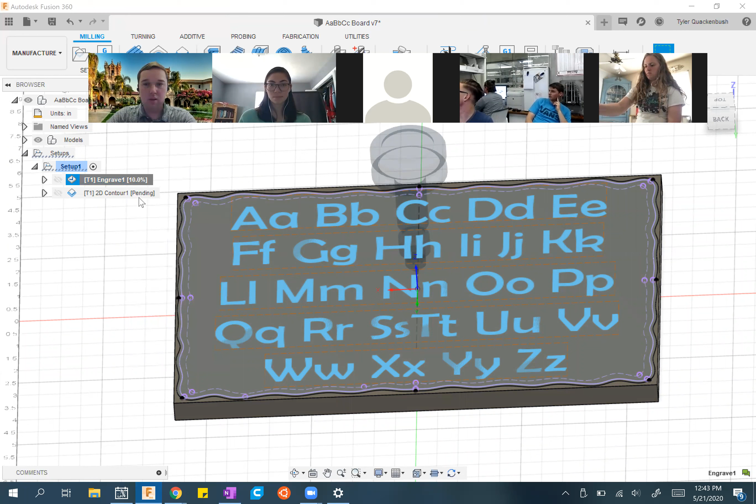Okay, well, I'll just show you how I did it. So when you select a tool that's a chamfer tool, meaning it has some tip angle, you're allowed to do different operations. We'll talk about chamfering later, but we'll talk about engraving now. When I come in with this guy, I can select lines that are separated from each other by some amount. So text automatically does it, but in this case, I've also made these two lines that are separated by a variable amount, making kind of a squiggly.

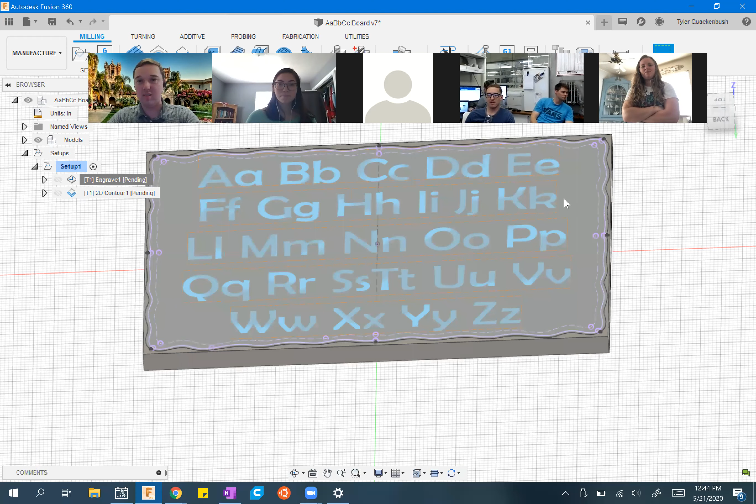When I select those ones, it comes in and it should generate. It's just probably gonna take half a decade. Sorry guys, I generated it before, but Fusion has this nasty habit of dirtying your toolpaths and then making you regenerate all of them. Pain in the rear. Sorry guys, should have protected these toolpaths or something.

So in case you guys are wondering, Fusion will sometimes dirty your toolpaths if you save and leave. In order to prevent it from doing that, you can right click and say protect toolpath. And what that'll do is it'll say, okay, I may or may not change other geometry here, but if I change geometry, assume that that toolpath stays the same. It's a little dangerous, but if you know you're not going to be making any more changes, it works just fine.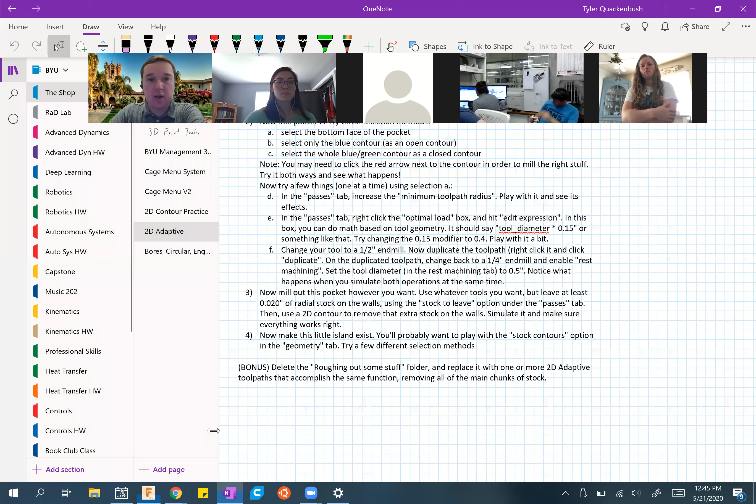Okay, well, maybe while that's generating and taking a decade, I'll show you guys what you'll be doing for your next practice. I have it ready this time, which is great. You guys are going to get a weird plate thing that looks like this. That has a couple straight holes and a couple tapered stuff and a couple straight pegs and tapered holes. It's a real mess. It's great.

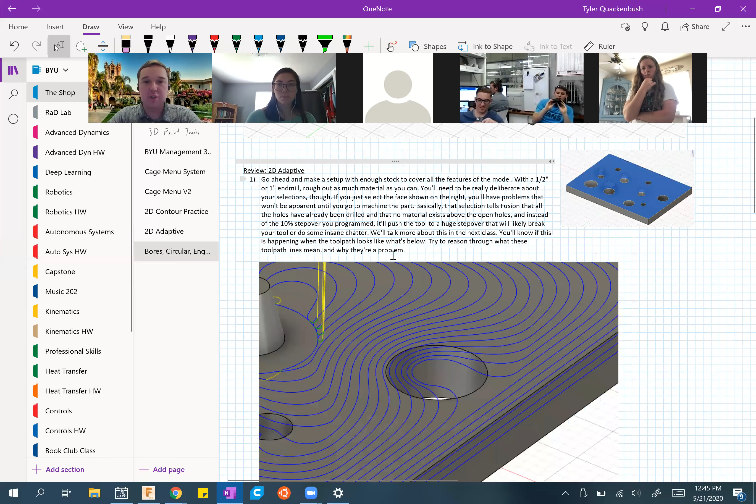And what you're going to do is you're going to make a setup, and then you guys are going to get some 2D adaptive practice, and you're going to rough out the top of this thing. So basically rough it down to that surface and not worry about the pegs. This is where that face selection is going to bite you in the butt. If you select just the face, your toolpath is going to violate some constraints, and it's going to break your tool.

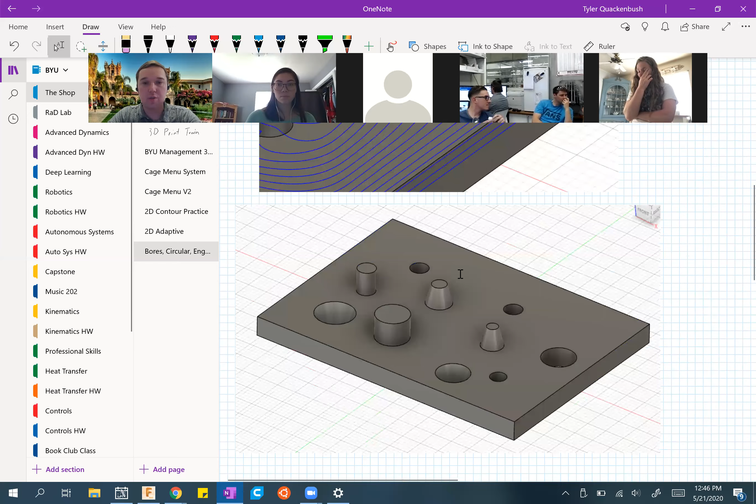Because if you select that face, you're telling it the material that's above these holes doesn't exist, so it assumes it can mill around it, and it'll actually do some weird stuff and break a tool. You'll go through in here and you'll actually take some time to look at what happens.

Then what you're going to do is you're going to do a couple bores and circulars on these different features. You're going to compare them. You're going to use different tools, and you're going to try to think of different situations where you do them. And you're going to play with some of the basic parameters. This one will be really quick.

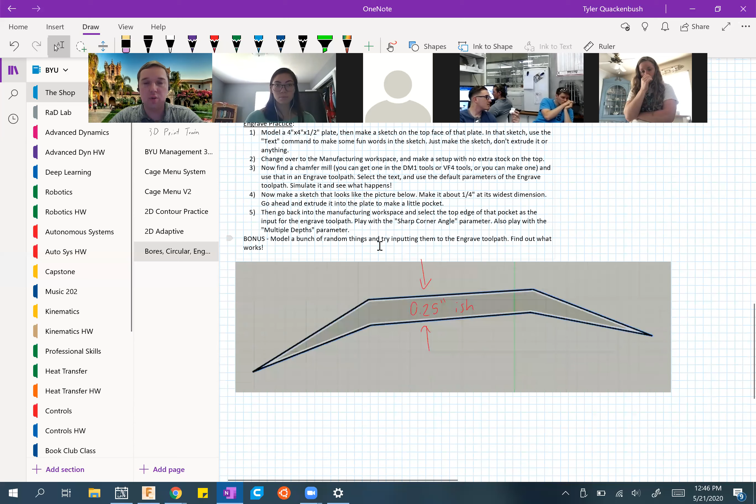Then you'll come in and you'll get some practice engraving. You'll put some text on a plate. You'll model something that looks like this-ish, and you'll engrave it, and you'll see what happens. You'll need to make a chamfer tool as well. Okay. This one's a lot of playing around.

So one of the things about these practice assignments, guys, is if you only have like 10 minutes, that's fantastic. Do what you can in 10 minutes, but definitely do them. I am not the greatest teacher when I'm not in person, and it's really easy to just talk at a screen forever. So you're probably not going to get a ton from me talking at you.

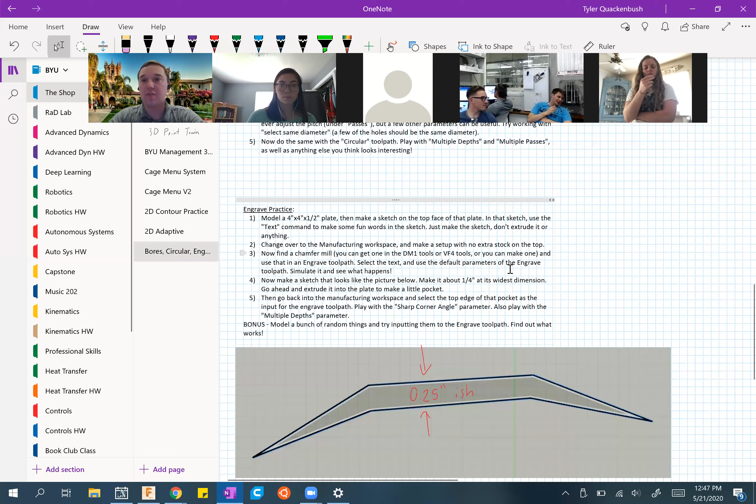But I've spent a lot of time on these assignments going through and really detailing them out into exercises you guys can go through and learn from. And this is where you'll get to the point where you can actually check people's toolpaths. You can actually run stuff on the router and really be dangerous in the CNC router world.

Okay, well, it looks like we've generated it. So I'm actually gonna hide my model and show you what this looks like. So if you remember those letters, what it's gonna do, the engrave toolpath says, okay, I have 2 lines. I have 2 edges here for you. I want you to go and find the right depth so that both edges of the chamfer mill are engaged on both of those edges.

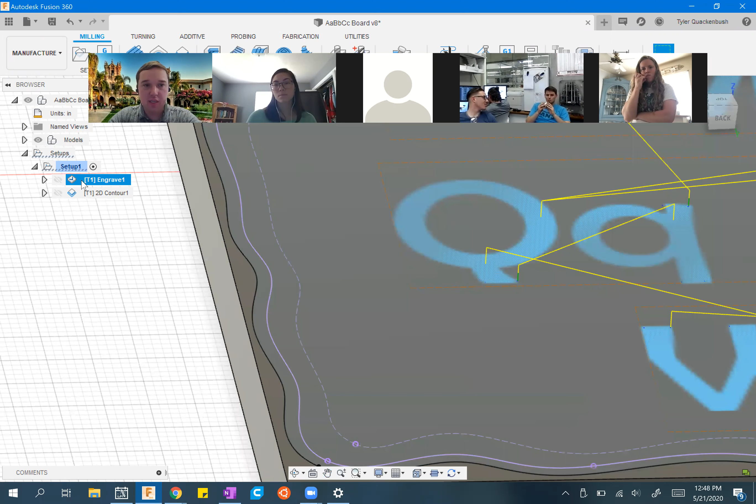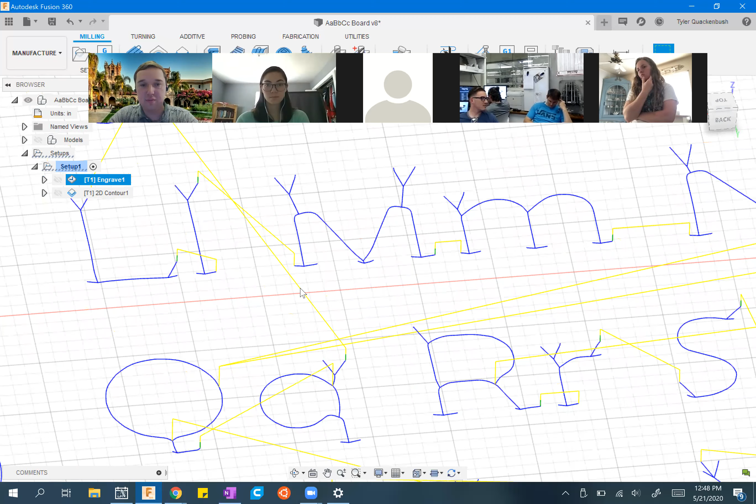So you'll see in here that it's actually variable depth. So this line on the outside is not all happening at the same depth. The tool goes in and out of the board and actually moves in 3 dimensions in order to make those lines work right. You'll also notice where it does these kind of upticks on the edges. That's to make the edges of letters square.

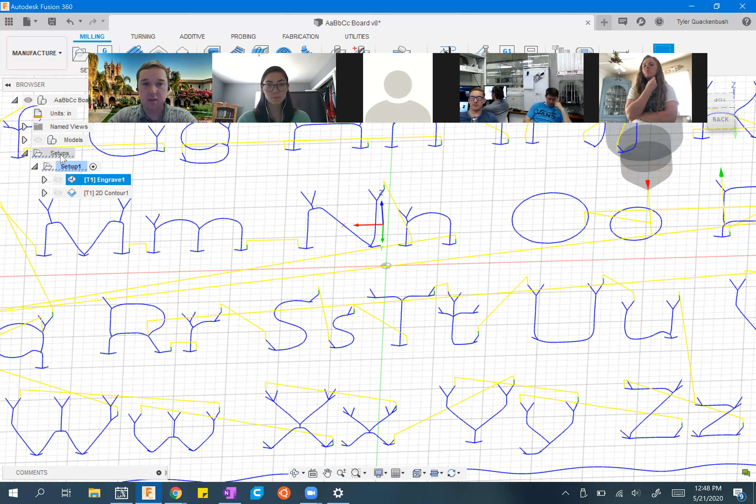So I'm going to show you guys what this looks like in simulation. I'm going to hide my model so that it doesn't get in the way. But we're going to simulate everything. This is one of the really cool things that CNC routers are used for way more frequently than anything else, is sign making. So you see this tool comes in, I'll slow it down so you can actually see what it's doing. It plunges in and out to get the right width based on a depth. And we'll just watch it go through.

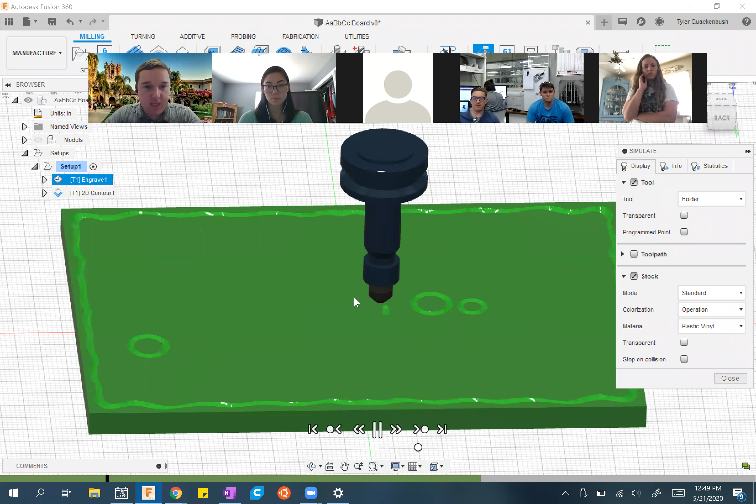So you'll see it come through and it'll do outsides, and then it'll do all these letters. And you'll see these letters have square corners, which is weird because we're using a circular tool. But that tool is dragging itself out and using its tip to make it look like corners are square. This makes lettering that's really, really clean and really, really fast.

Yeah, with my router at home and taking router jobs and stuff, this is primarily what people want to pay for, is having really fancy, fun signs. They're also really cheap and easy Christmas presents if you guys want to blow away your relatives. But the engrave toolpath is a really, really useful tool, not just for making fancy lettering, but primarily for making fancy lettering.

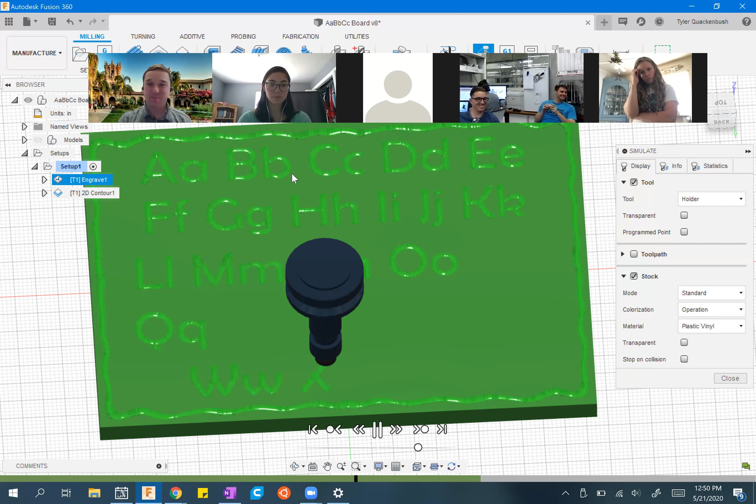Okay, well, you guys will get some playtime with that in the practice assignment. Any questions about the engrave toolpath so far? Awesome, guys. Well, take a stab at that practice assignment and really enjoy it. Fusion's really fun.

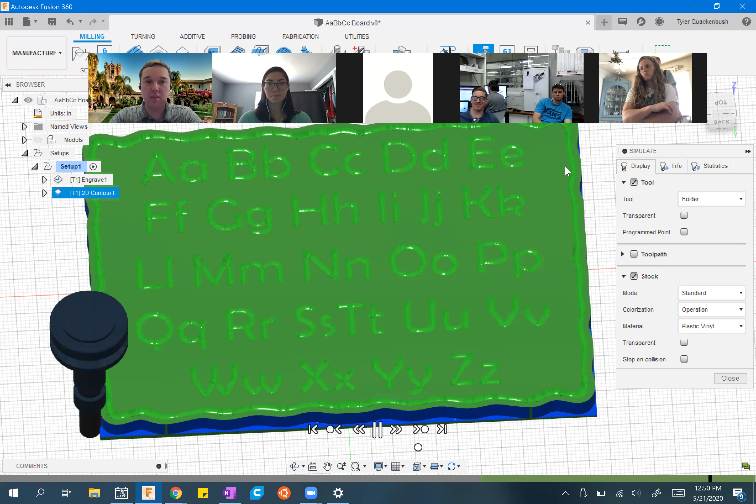I hope those of you who are continuing to go in the shop can get someone who knows CNC well enough to sit down and actually help you mill some stuff out. The ShopBot is a royal pain in the bum to work with, so I don't recommend you use the ShopBot with Fusion. But I'd recommend trying a little bit of stuff on the mills with aluminum.

See if you can get a plate and engrave it if you want to, do small lettering, or see if you can get somebody who knows feeds and speeds in Mastercam at least to sit down next to you, and the feeds and speeds transfer directly over to Fusion. So if you've milled aluminum in Mastercam, you can do aluminum in Fusion. Play with some stuff, figure out what you can do. I'm sure Nick is fine with you guys burning through some scrap aluminum to really get some insight here.

Oh, it's Austin. Wow, hi, Austin.

Okay. Any questions before we take off? I have a question, Tyler. Yeah, fire away. Do we have G-Wizard or something yet? Oh, I have not coordinated a ton with Nick on that. That is something I need to do more of. Thank you for doing that. All we've really talked about is that FS Wizard thing. Okay, that works great. But yeah, I definitely recommend people start taking a stab at some simple aluminum parts with Fusion and really getting a feel for what it does.

Those of you who are at home, sorry, you don't have a machine. Not a lot you can do other than learn to click buttons, but that's okay. When you get back, you'll be really good at button clicking and just need feeds and speeds.